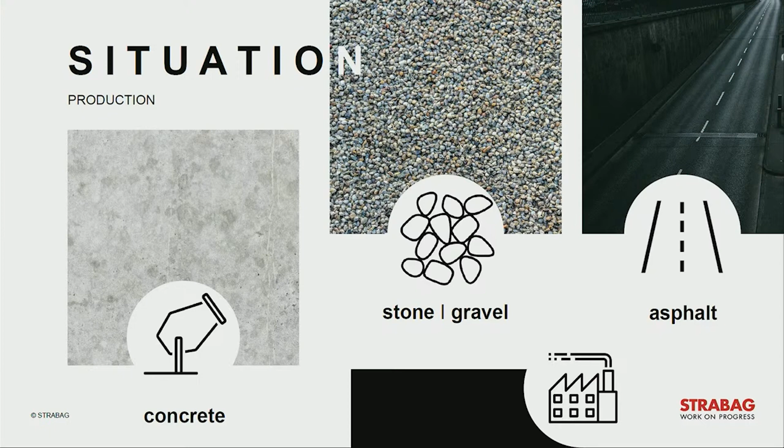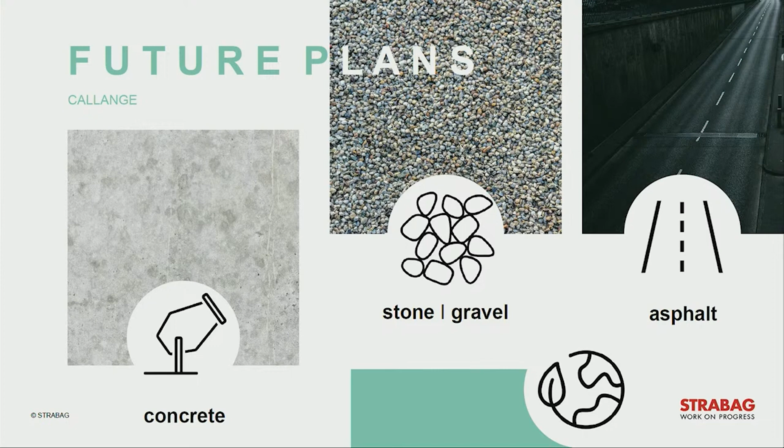STRABAG is currently focusing mainly on the production of important but CO2-intensive building materials such as concrete and asphalt. It is well known that the production of cement is associated with significant CO2 emissions, and that this industry alone contributes 6 to 8% of global technogenic greenhouse gas emissions. With this in mind, we are aware of the challenges associated with the use of these materials. We are therefore working hard to minimize the environmental impact of our activities. Our efforts are focused on developing solutions that allow us to make our construction process more sustainable and reduce emissions with conventional building materials.

At the same time, we are working on integrating green and sustainable building materials. These materials are characterized by a lower environmental impact and help to reduce the CO2 footprint of the construction sector. By developing and using eco-friendly building materials, we want to make a positive contribution to protecting the environment and combating climate change.

As part of our research and development efforts into eco-friendly building materials, we have carried out full analysis of different potential raw materials. We have looked at which of these are available in our latitudes, are renewable, and ideally occur as a waste material. Our aim was to find materials that could replace conventional building materials without placing an extra burden on the environment.

In the process, we came across materials such as reed, hemp, and straw that are already in use. These natural materials are characterized by their low environmental impact and can be used in construction without the need of chemicals. Straw, reed, and hemp can not only be used as single materials, but also in combination with conventional building materials. They can even replace particular building materials on a one-to-one basis and therefore represent a sustainable alternative to conventional building materials.

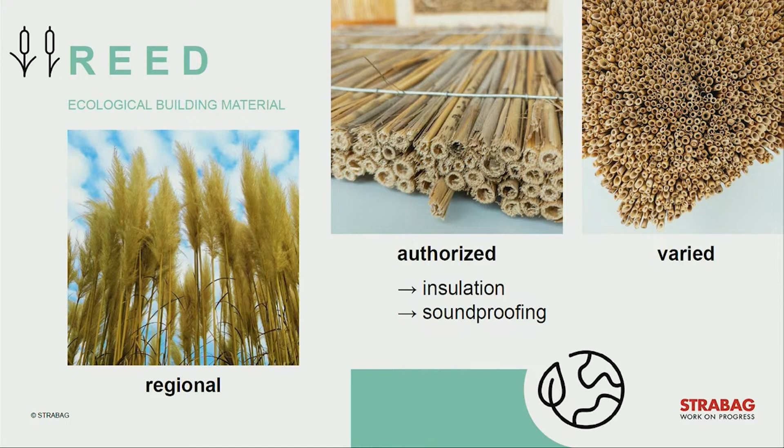So, the first one is reed. Reed is a sweetgrass found in the wetlands around the world and grows up to 4 meters high. It grows in banks, in ponds, in monocultures, and is cut once a year in the winter to maintain the areas. Harvesting takes place traditionally in the winter on frozen ice, which has the positive side effect that the fauna and flora of the reed ecosystem are affected as little as possible. Traditionally, reed can be used as roofing, or as multi-laid reed isolation panels and as plaster base in clay construction, or as an impact sound or blow-in isolation. It does not absorb damp and therefore rots very slowly.

So the next one is hemp. Hemp is one of the plants with the longest cultivation tradition in Europe. It reaches a height of up to 3 meters and a mass of 10 to 12 tons per hectare in a vegetation period of only 120 days.

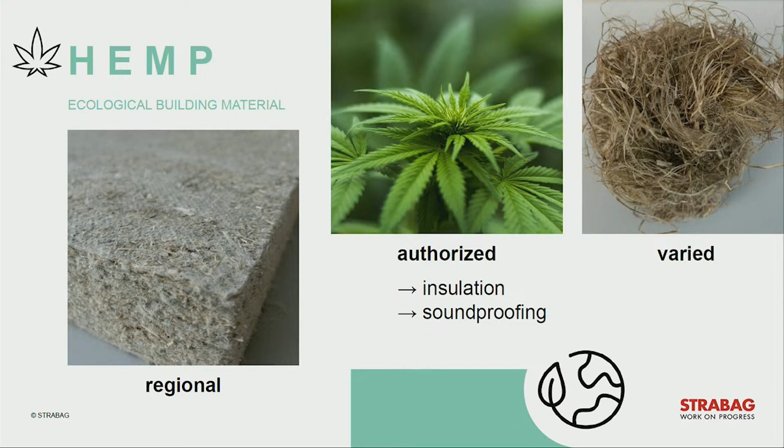The last one I want to present is straw. Straw has been used as a building material for centuries, but sadly has been forgotten. In view of the large volume of grain grown on our available land, there is enough straw available for use in construction.

Straw is an every-year renewable raw material and does not compete with food production. None of the raw materials mentioned are in conflict with food production. I think it is available locally, requires no extra production or energy input, and causes no extra environmental impact.

Straw can be used in many different ways in the construction industry. For example, as blow-in isolation, the easiest way, as a sound-absorbing component, as fill-in for building straw bales, and even as a load-bearing structure made from building straw bales. That's a very cool thing.

It's important to point out that sustainable building materials made from renewable raw materials are not the only solution for building projects. In fact, a balanced combination of different building materials is essential to optimize building quality. At this point, I would like to point out that many materials, such as conventional, non-recyclable isolation, can and must be replaced on a one-to-one basis in many cases.

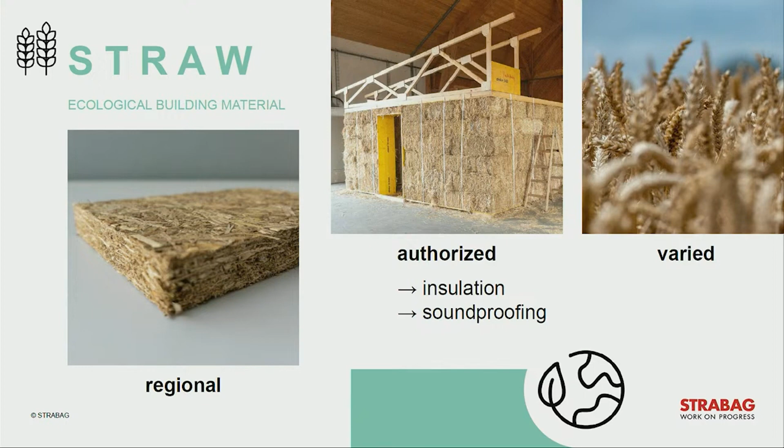Unfortunately, many of these alternatives have been forgotten since industrialization. However, through the introduction and targeted use of such building materials, we can make an important contribution to reducing the ecological impact of construction, among other things.

The world is facing big challenges, such as climate change, social inequalities, and limited resources. The way we manage and build today will be critical in shaping the coming decades and the well-being of future generations. In view of these challenges, the optimal use of existing, preferably renewable and regional resources is becoming more and more important for the construction industry.

Promoting sustainable use of materials and resources is of key importance. The aim is to develop and use only building materials that are recyclable or biodegradable.

Ecological construction calls for initial investment, but leads to cost savings in the long term. This is where industry meets culture. Once a building has been completed, nobody asks what it costs, only what it's worth. Thank you.

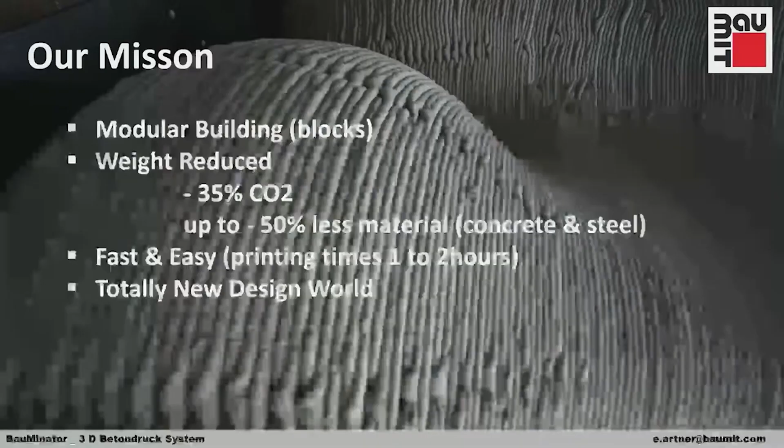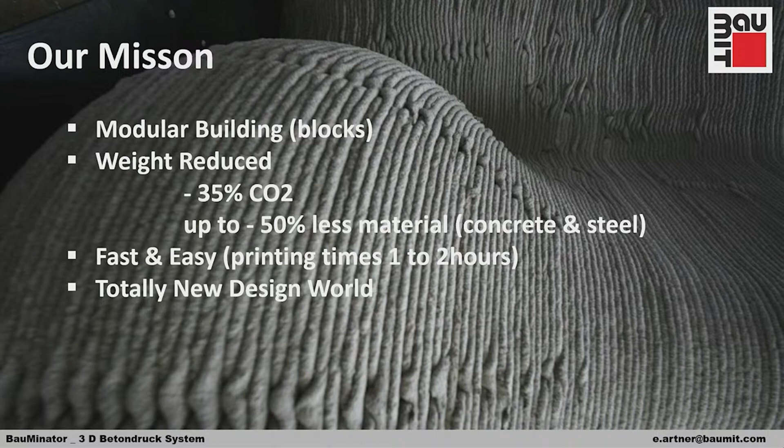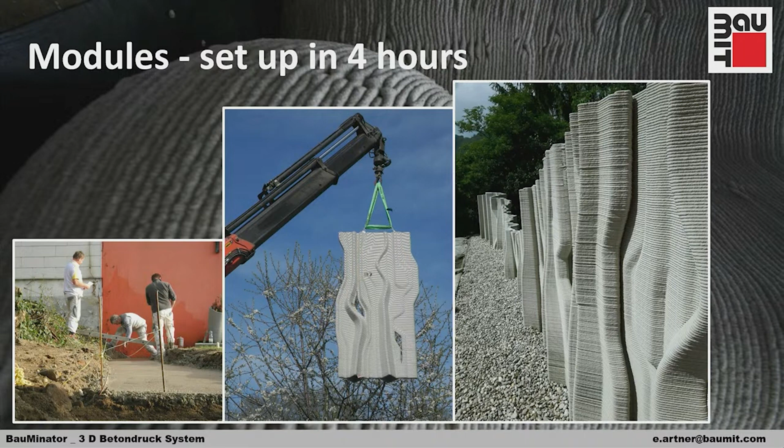But that's the mission. Let's hop through a lot of projects. That's a very easy one. It's just a playground, a garden fence. But at the end of the day, it's a type of module, and this fence is about 10 meters in length, and the time you need to build it up is around 4 hours, and then it's done.

The next one has been done in Innsbruck at the university. It was a project together with Habau, and the topic was simply to try to find an exotic design, but it always needs to be a building module, and it needs to be weight reduced. In this case, if you would like to go with standard technology, forget it, it's too expensive and you simply wouldn't manage it.

In that case, you just need about 20% of the material compared to a standard technology.

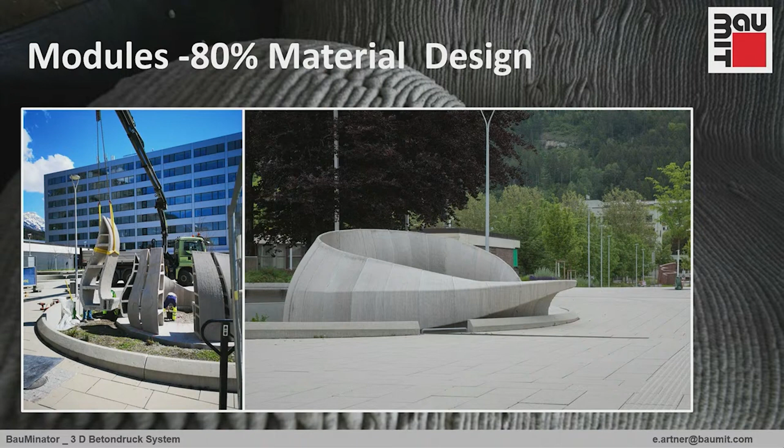But now let's go to the real world. We intend to find real-life applications where you guys really benefit from it. This is a project in Germany, not an easy market in terms of rules and regulations, as most of you guys know here.

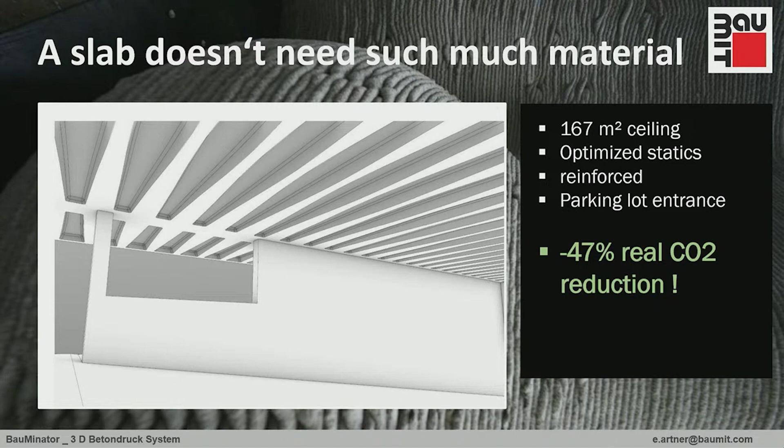And it is the entrance of a parking lot, about 170 square meters in dimension. It's a ceiling, and this is the first draft. How did we do it? It's a very simple idea. It's like in the 60s, you avoid volume by implementing small blocks, which, as you see on the right-hand side, where you have those hollow structures, and you simply place material where you need it and leave it out where you don't need it.

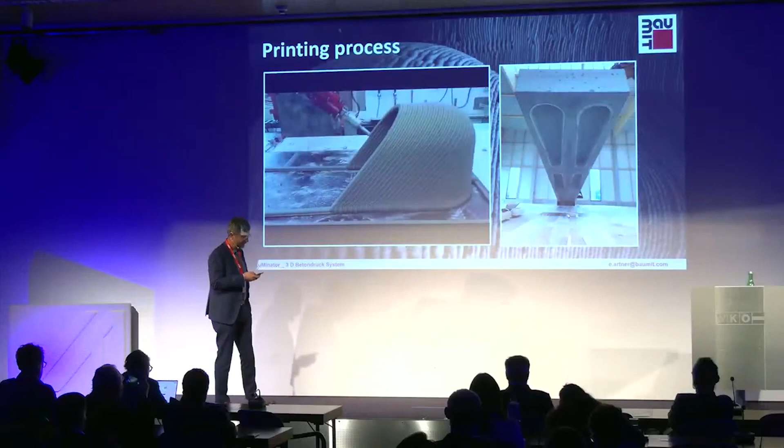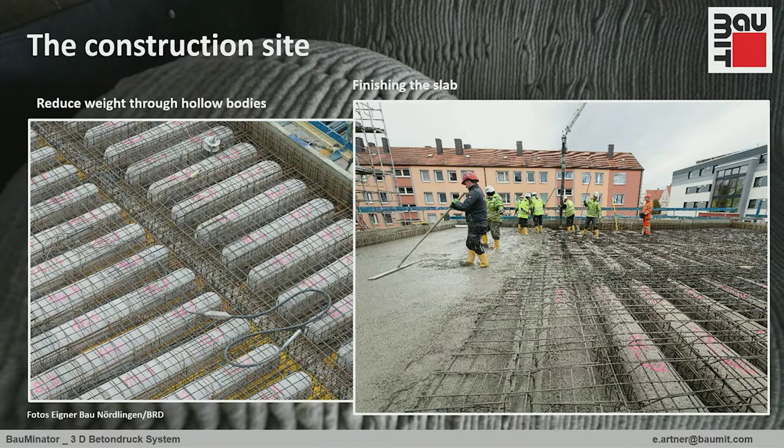This is the construction site itself. You combine good new technology with old methods. The point is, it's reinforced the standard way. You have all those parts here to generate the hollow parts, and at the end of the day, you end up with about 40% less material needed for this one.

Let's go one step further. This is how it looks like in reality, and we are really happy to announce that we got the German Architectural Award end of last year for this building, mainly because of the environmental and sustainability issues.

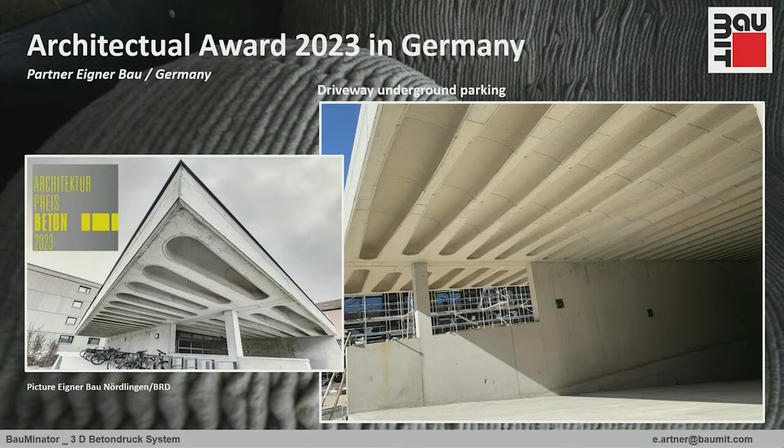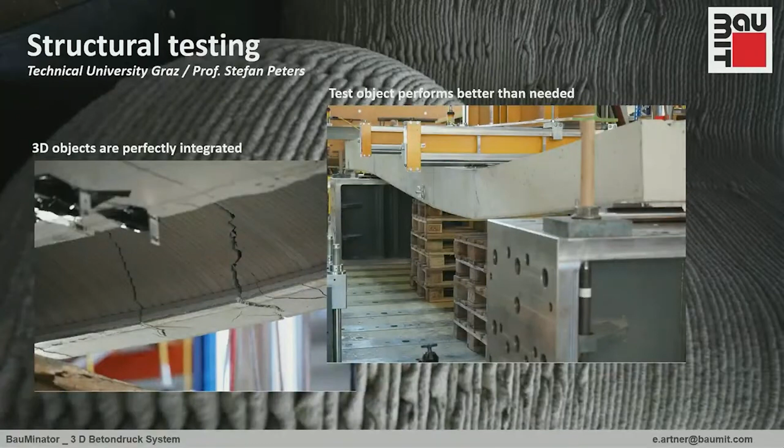But we can play this a little bit bigger. Just for those who are in the building industry, we have all the testings which are necessary to build it. That means all the heating tests, all the tests which you need to build it. On the right-hand side, you see this beam from before. It is tested till it breaks. It's like a banana, but it still didn't break.

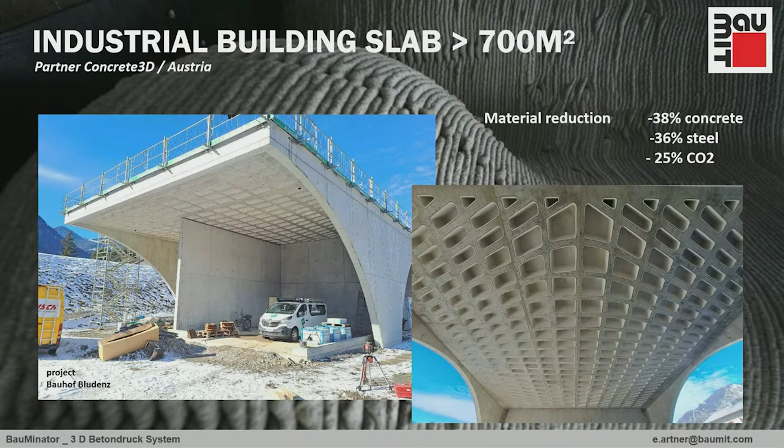And this is now the biggest one, which we realized about half a year ago. That's a building in Bludenz, in Vorarlberg, Austria. This one is 700 square meters in size. And at the end of the day, you save easily about 30 to 40% on steel and concrete as well. The simple formula is, if you don't need such a lot of material, you also save CO2, and that's more or less a no-brainer, and it looks simply great.

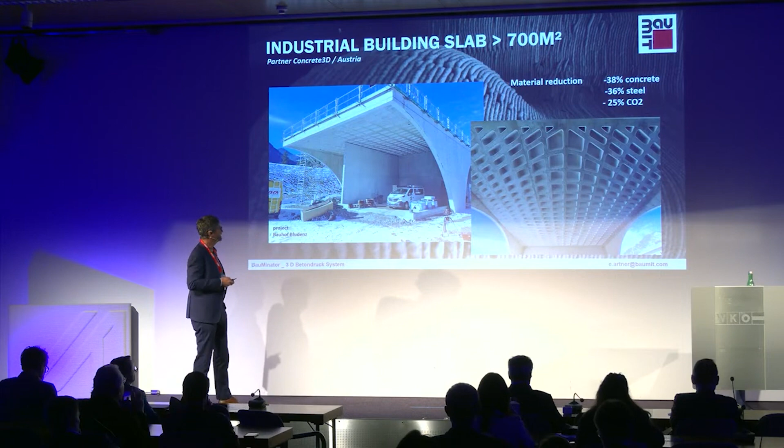Where do we stand with these projects? We have now about 2 and 3 new projects ongoing, all in a size between 500 and 800 square meters. We are really developing further on this type of construction method.

This one, now let's jump from the big one back to the small one. This is simply an example which we built up directly at our home base in Austria. What does it stand for? Very simply, that's the same type of ceiling which you have seen before. It's simply an example of what you can do with this type of technology, and what are the possibilities of modular building.

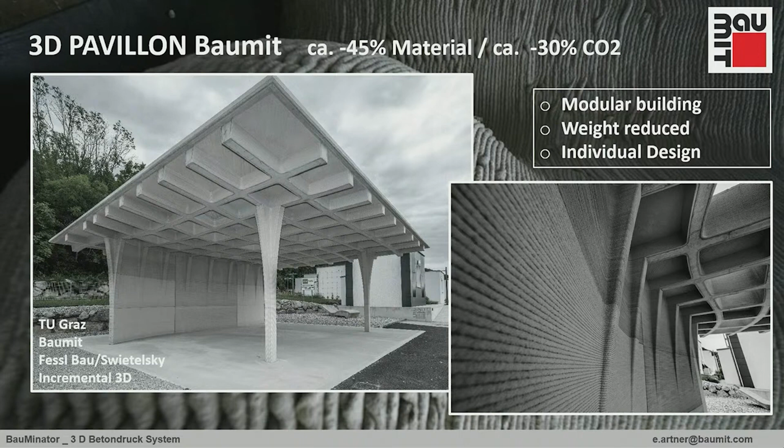You see those columns here. They are, at the end of the day, cut in 3 pieces. You simply stack one on top of the other, and you can do it with a normal design. You can play around as whatever you like. Printing time of such a piece, 10 minutes, something like this.

At the background, you see here these wall parts. They are about 3 times 2.5 times 1.5 meters. Printing time is about 1 hour 20 minutes, roughly like this. And you print your modules, you bring them to the construction site, you set them up, and you go home again, and everything is easy and fine.

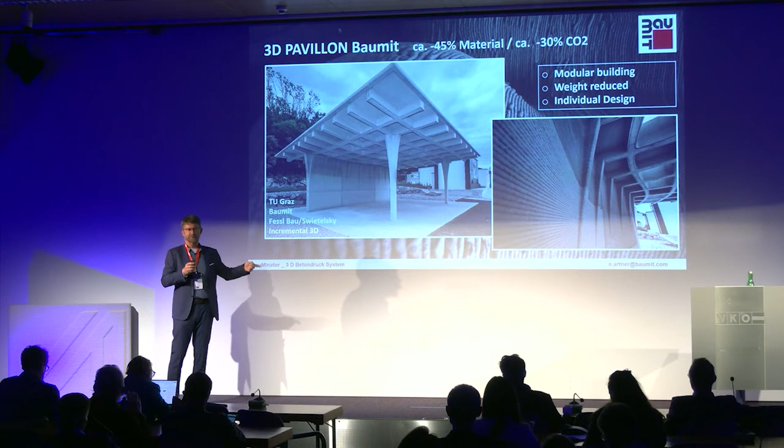And in this case, they are fully filled with concrete and they are reinforced, but you can also do them in a type of hollow construction so that you end up with the same material savings as you have seen beforehand. And that's a very simple one.

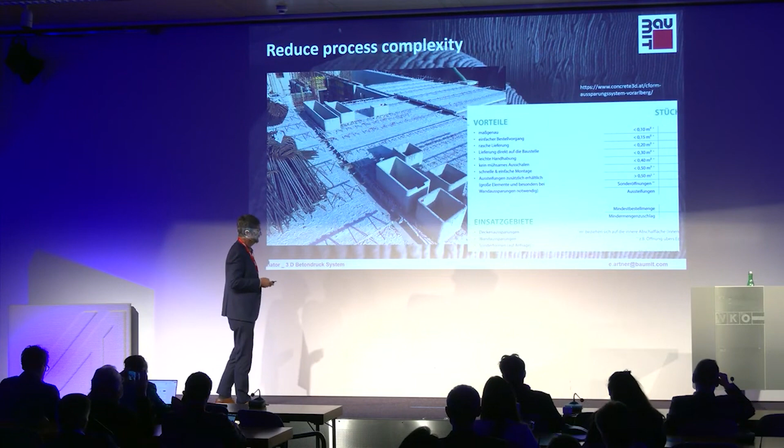You can order these type of parts, 1,500 or whatever, and you place them directly at the construction site. You avoid all your wood to cut it, to tear it apart, to bring them out. So it's pretty simple and easy, and you avoid a lot of complexity in the building process itself.

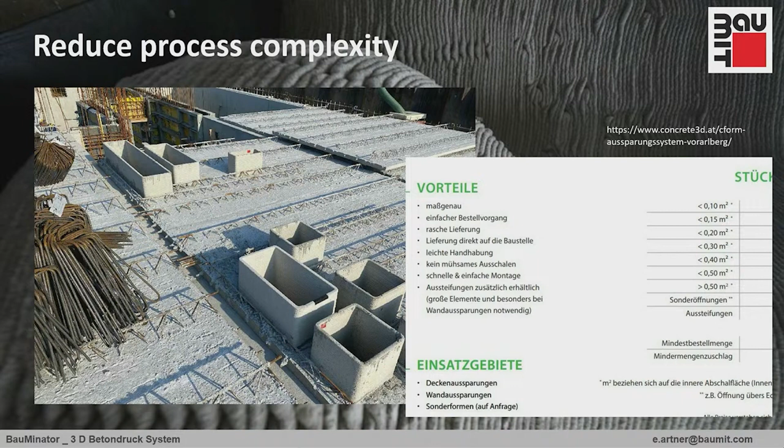Now we have a project in Germany going on where they need about 1,500 of those pieces. At the end of the day, pretty simply, as I'm a technician, a little bit of technical information: it's a 2-component system for those who know it. The compression strength is around 35 megapascal, and 9 is the tensile strength.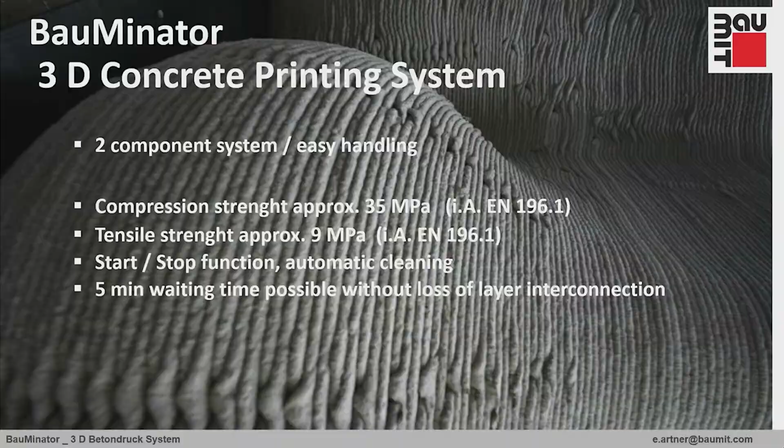What's very important for those guys who are in the concrete business, it is a start and stop function, and the material sits about 1 hour liquid. That means you can easily incorporate it or build it up in a precast factory, because you do not have any hurry to clean or whatever, because you can wait 1 hour till the next step.

Yep, and this is a quick movie without the sound. Maybe you can play it, otherwise I can comment on it. Those are the parts of the garden wall. They're about 2.5 meters, up to 3 meters in size. This is one.

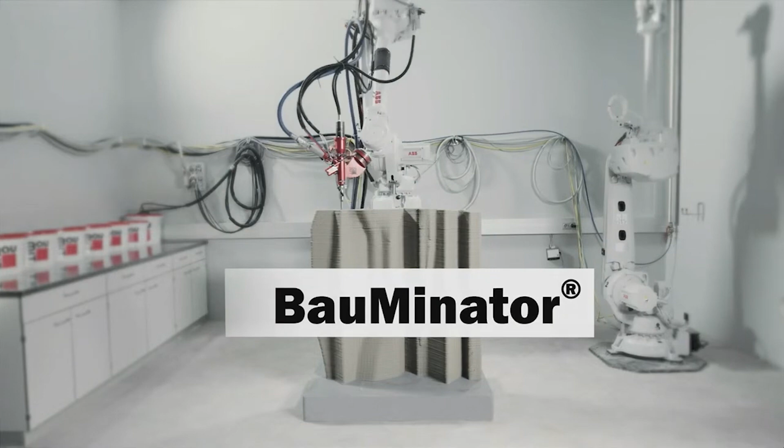Here you see how they printed. This guy is standing in front of you explaining the same thing I said the previous two minutes. Important is that you can print angles up to 60 degrees, which means you are very free in printing a form.

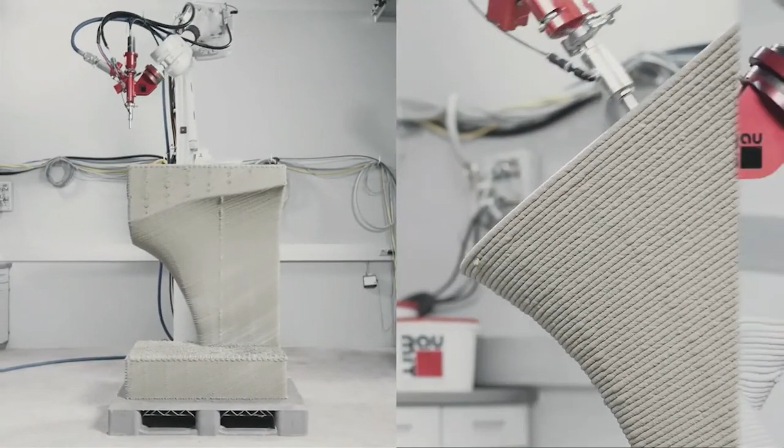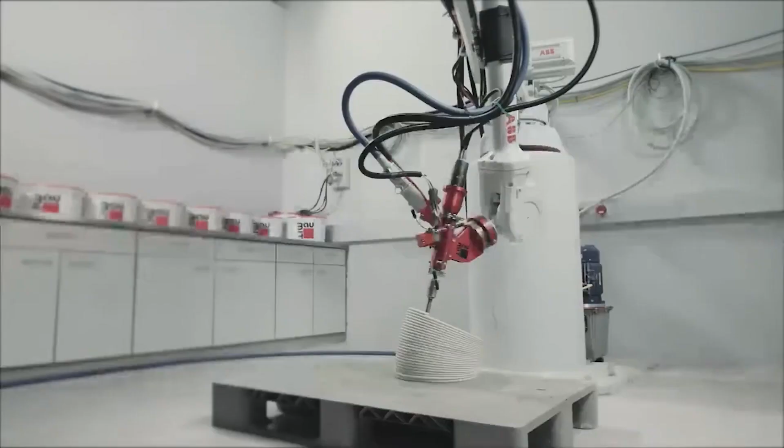That's the start-stop stuff, very important, because you do not need to continue the same path. You can stop, you can start, and therefore you have access to a lot of different geometries. This is pretty impressive.

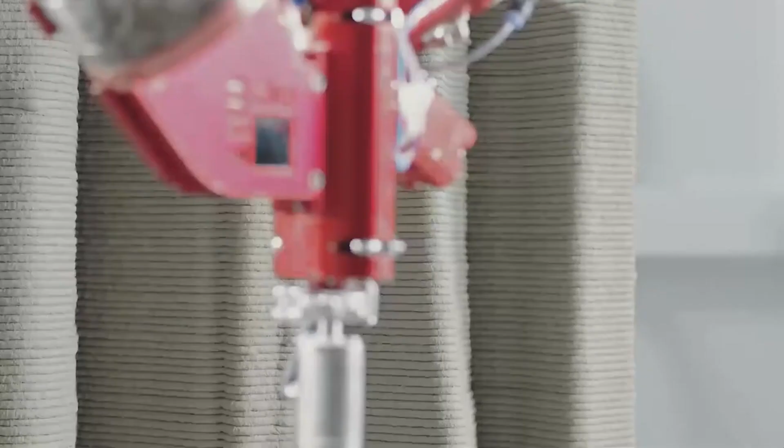It's playing around. You can really steer the system, playing in a parallel manner. And if you want a plane surface or whatever, always combine the good old stuff with the good new one. You can smoothen it, reinforce it, sandblast it, paint it, whatever you like. It's always combining all these available methods to get the best final result at the end of the day.

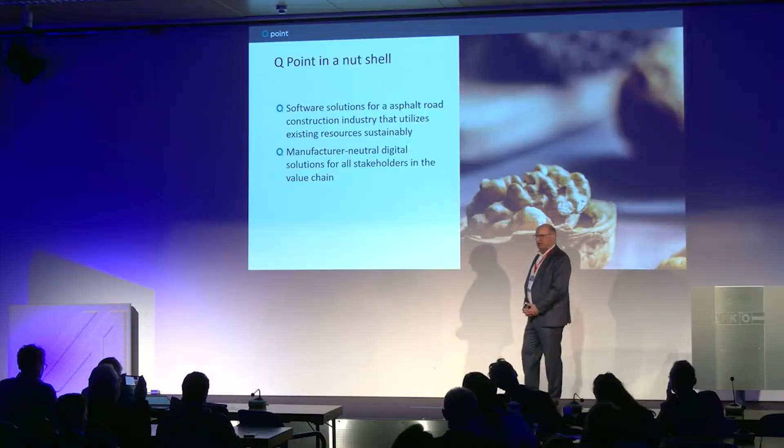We are a software company focusing on digital solutions to support the processes in the asphalt industry and all stakeholders in this area. Why asphalt? Asphalt is a material common around the world, and if we think about electric cars or anything else, rollers, bikes, we will need asphalt also in the future.

If we look at the production of asphalt, you see here some figures. In the European Union, we are producing 212 million tons a year of asphalt, and if we go a little bit further, we have around 280 million tons of asphalt.

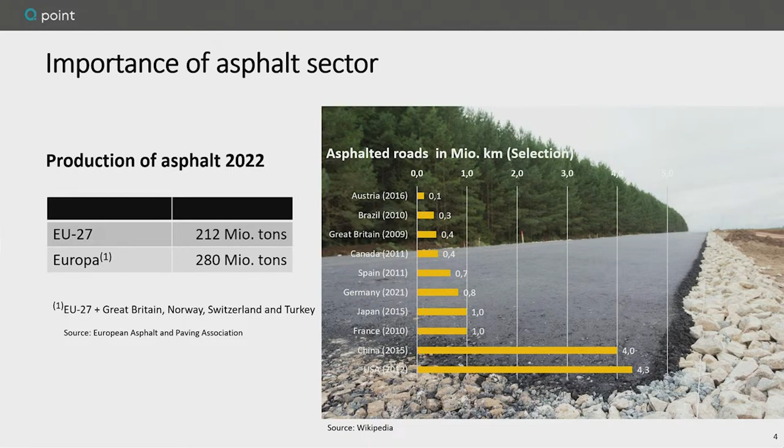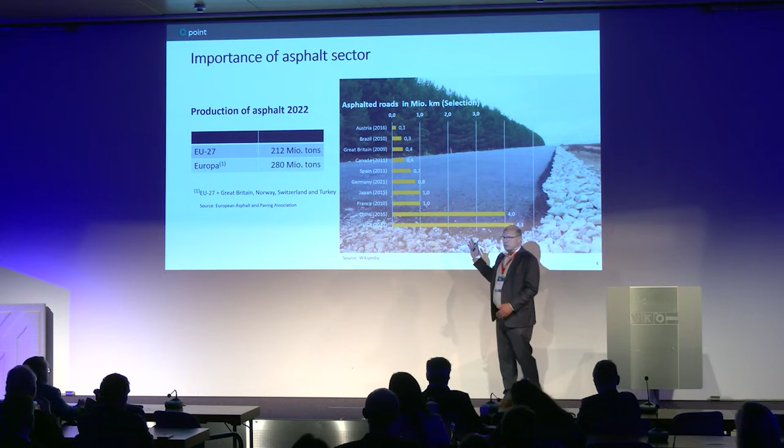Here's a statistic about asphalted roads in the world. You see USA and China have the longest roads of asphalt in the world, but the European countries also have a long network of asphalted roads. That means if we are not building new asphalt roads, we have to maintain and repair them. So asphalt is not only a product of the current situation, it's also a product of the future.

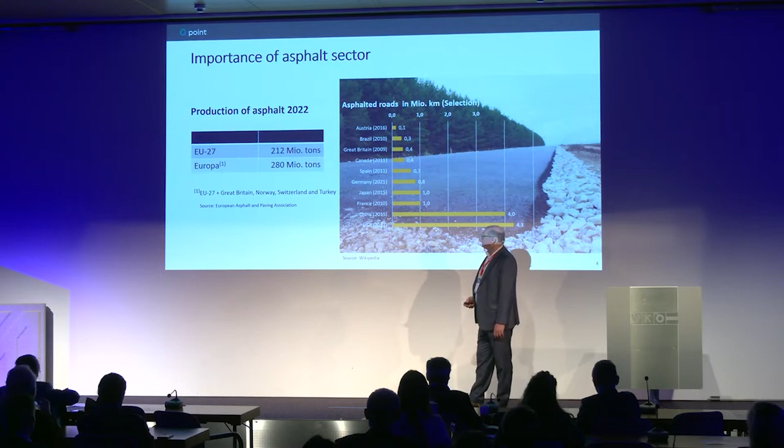If we look at the CO2 emissions of the asphalt production process, we see that most emissions come from producing the raw material, which is bitumen in most cases, and from the production of asphalt in the asphalt plants. Then there are other aspects: transport of raw material, transport of asphalt, and finally the laying and installation of asphalt. So we have to concentrate on this first part and this third part of the whole value chain.

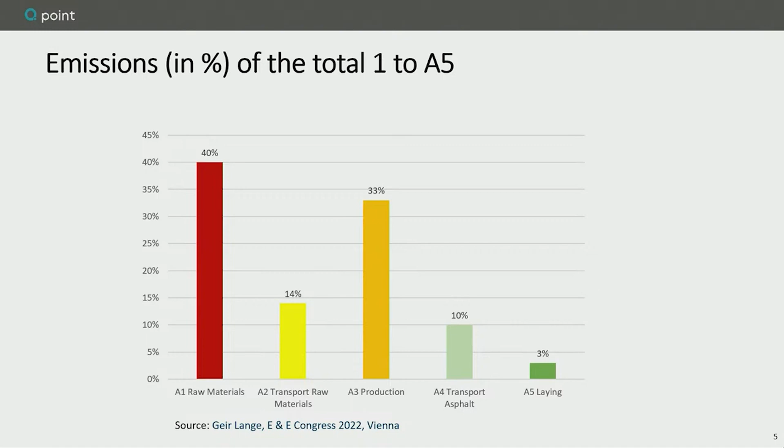Producing is a technical job, but it's also necessary to know what you have to produce, and this is exactly what we are doing here. We help the asphalt plants find out in a better way what they have to produce, to optimize their production program and many other things.

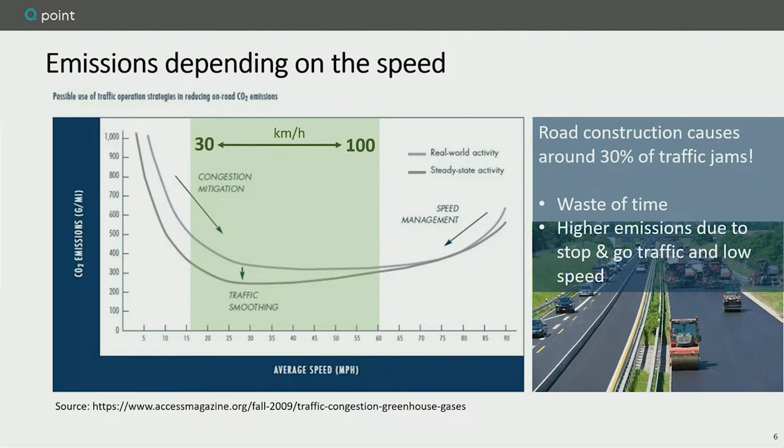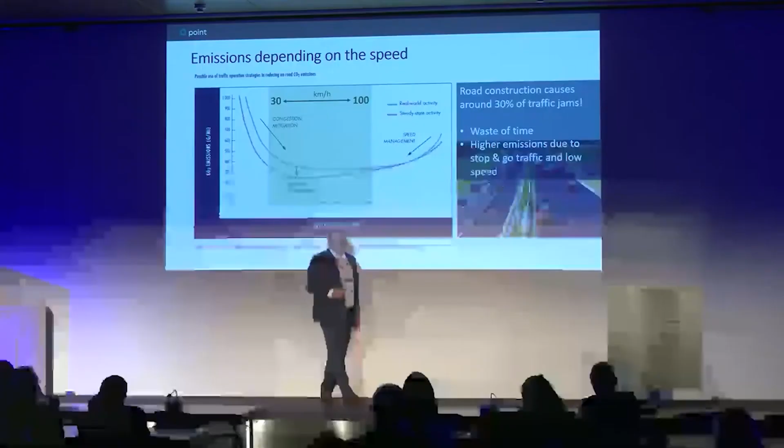But we know that if there's construction on a motorway, we get stop-and-go traffic, which reduces the speed on the motorway and costs a lot of CO2 emissions, which could be avoided if we could speed up the construction. So how can we do it? The problem is that asphalt is a just-in-time material: you produce it, you can store it a little on the asphalt plant, then you have to deliver it, and then use it on the construction site.

You cannot store it on the construction site. The second point is that continuous pavement is important. That means this machine, which we call a paver, is continuously working so that the temperature of the asphalt is always the same - the asphalt already laid on the road, and the new asphalt coming from the paver onto the road.

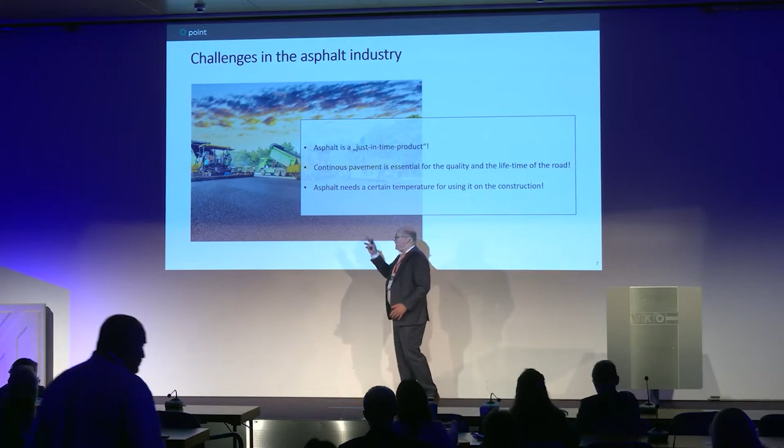The third point is that asphalt needs a certain temperature to be installed. If it gets too cold, the quality of the road becomes bad, and that's also a very large problem.

What are the main things we have to consider if we look at the asphalt industry? We have a lot of requirements from stakeholders - government regulations, financial institutes, and also society, which expects us to do a lot to make it more sustainable.

We have to use more recycled asphalt, bringing material from the road back into the production process. We have to reduce batch changes, because producing different types of asphalt is very energy costing - it costs a lot of energy to change the type of asphalt in production.

A continuous production with the same recipe would be the best way, but you have to manage that. We also have to do a lot of documentation for maintenance over the next 10 to 20 years. We have to increase the lifetime and quality of roads, minimize emissions, reduce transports, and shorten construction times.

How can we do that? Our idea is to support people along the whole value chain with an integrated digital solution - starting from the planning of a project, the ordering of asphalt, the production process to optimize production, and also integrating the truck driver for the delivery process.

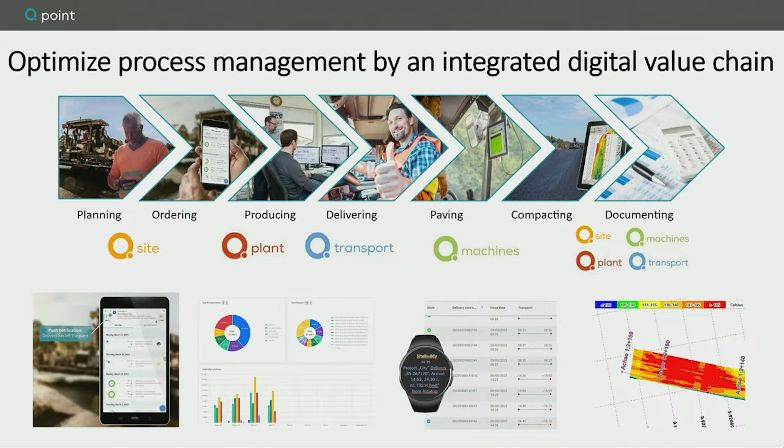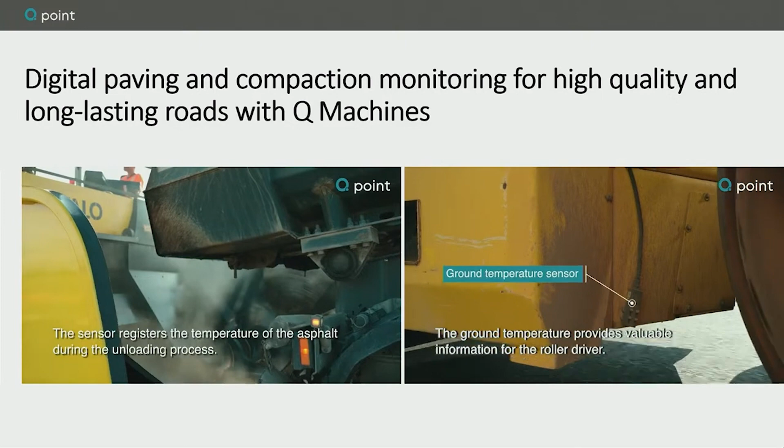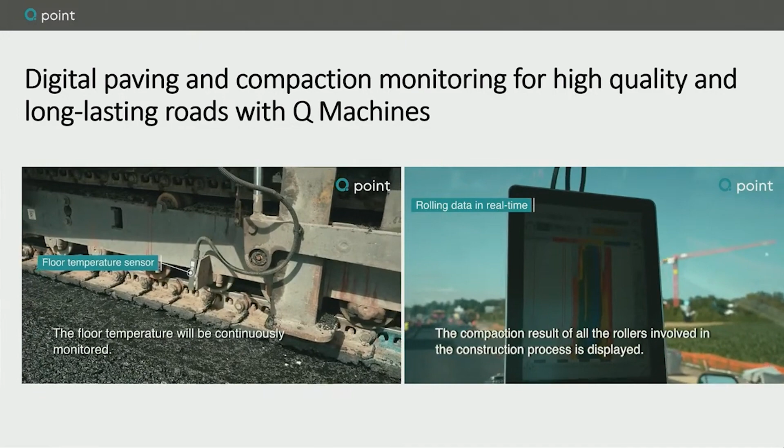Here's a short video. You see here a paver. We equip this paver with different sensors to measure the temperature, because it's very important to know the temperature during the paving process. On the right side, you see the rollers making the road - also equipped with sensors measuring temperature and the number of passes during construction.

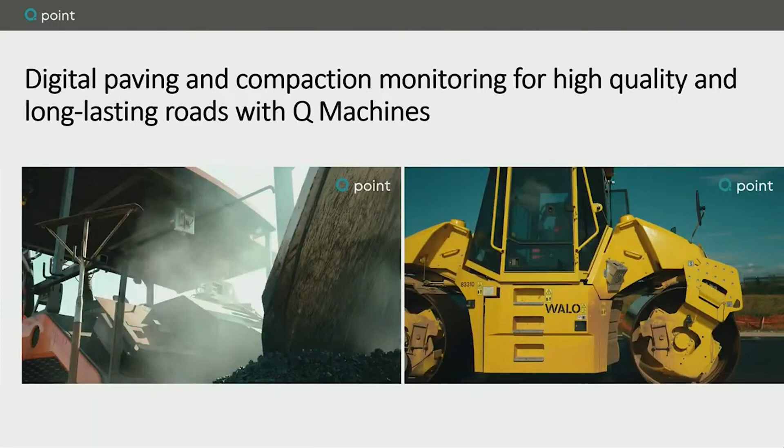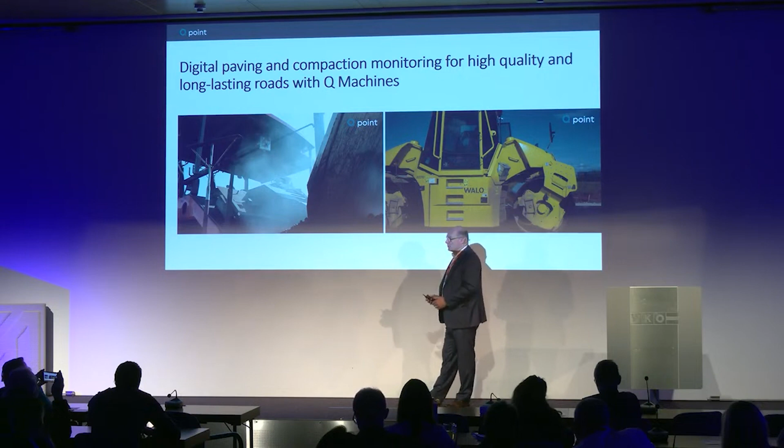All these machines are linked together, and at the end of the day we get very good documentation and the right information for the people on the construction site to do a good job - to have a high-quality, long-lasting road, with short construction time.

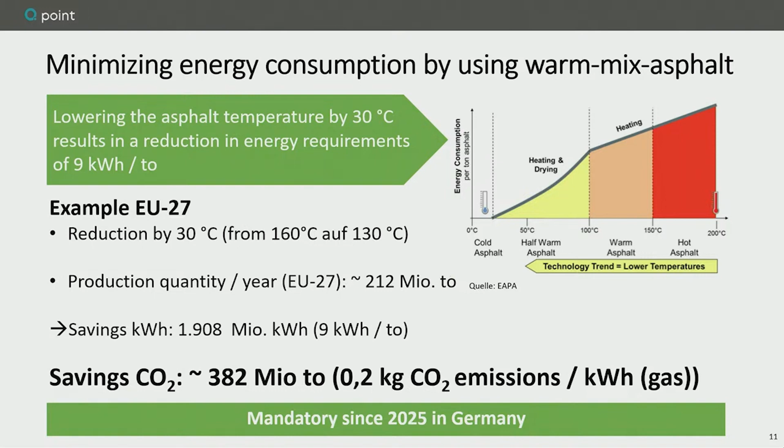Another example is reducing the temperature of asphalt in production. Here's a short example: if you reduce the temperature of asphalt by 30 degrees, which is normal, and we produce 200 million tons of asphalt a year in Europe, you save around 382 million tons of CO2.

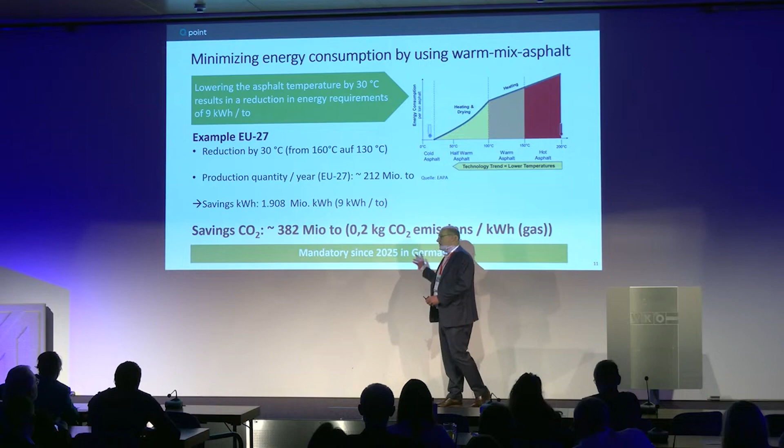Because production is one of the most CO2-consuming processes. In Germany, it's mandatory to use low-temperature asphalt since 2025, but I know there are a lot of companies and countries not yet thinking about that - though it will bring a very high effect on CO2.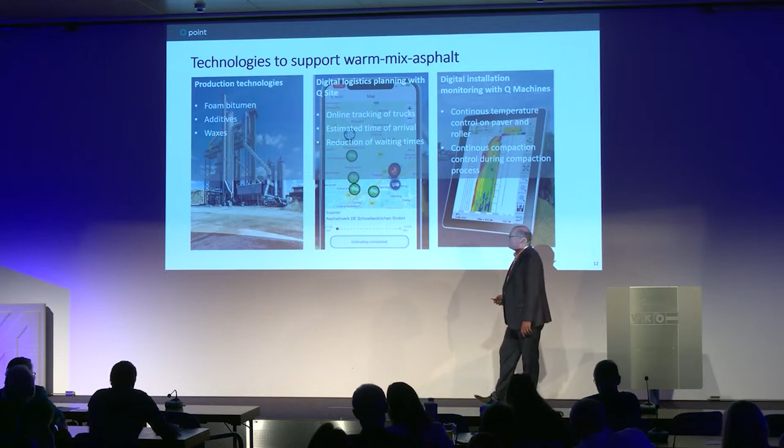How can you produce low-temperature asphalt? You need the production technologies, but these technologies already exist. You need precise information on the transport and the way the asphalt travels to the construction site, because if the temperature gets too low, you cannot bring it onto the road.

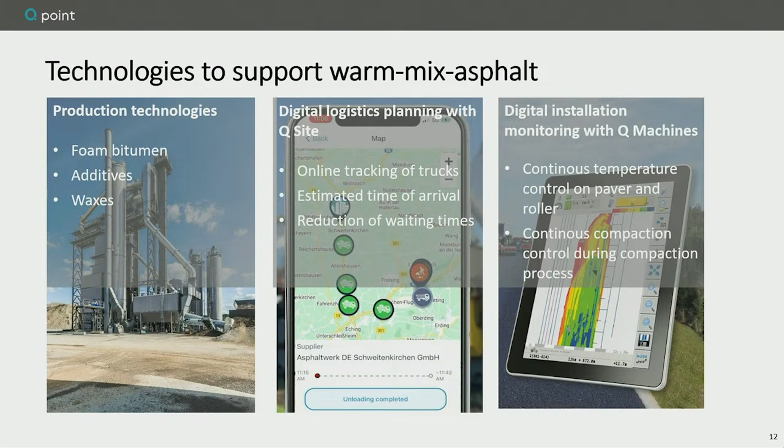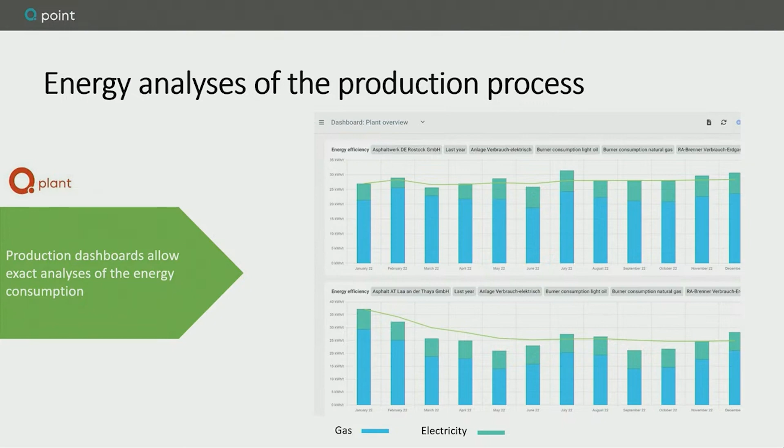So you need information about the logistic chain, and information during the installation procedure. We also provide information about the energy consumption of the asphalt plant and the whole process, which helps to analyze and optimize it. At the end, you have a digital information database along the whole value chain.

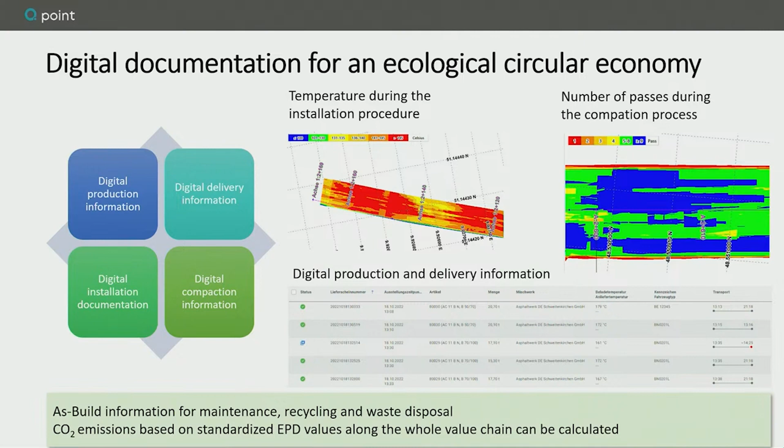You have delivery information, temperature information, and installation information - this is the documentation you need in 10 or 15 years to maintain and repair the road again.

So what are the main advantages? To summarize: we can reduce the usage of resources, help people make better decisions, and support people on the road or on the construction site. The process becomes more efficient, and I tried to explain what the benefits are.

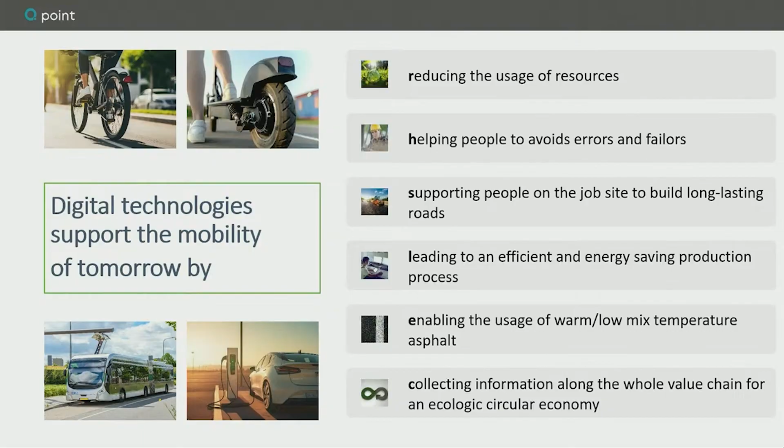We can also support low-temperature asphalt, which is very important for CO2 emissions in this process, and we collect a lot of information. We are working for the future of these children. Thank you for your attention.